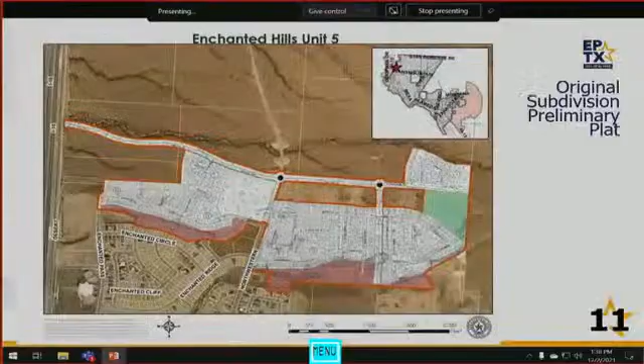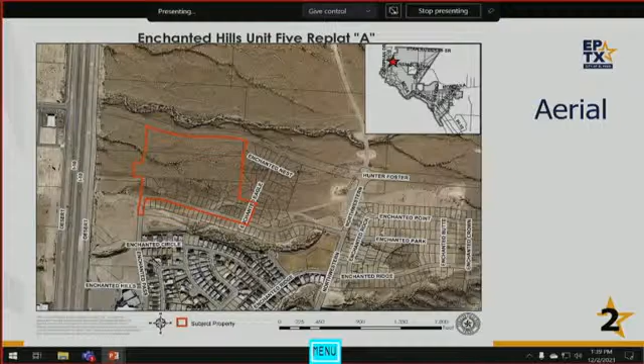We'll get back to the beginning of the presentation. So Enchanted Hills Unit 5 Replat A is item 3 on the agenda. This is a re-subdivision combination application for 32 single-family lots, one 14-acre commercial lot, and one lot for a drainage pond that is approximately .4462 acres. This lies within and is in conformance with the Enchanted Hills Land Study of 2008. As such, the proposed subdivision was granted vesting rights and is being reviewed under the former subdivision code in effect at that time. Here we have the subject property on the aerial map. You can see to the west, north, and east is vacant land, and then to the south is single-family residential subdivision development.

Here we have the subdivision plat superimposed on the aerial photo, and I will outline the changes proposed in this re-subdivision plat. They are proposing to extend Enchanted Pass Drive up to intersect with Hunter Foster Drive, the road on the north. Just to the west of that, you see in purple the new proposal for the drainage lot. The lot configurations of the lots on those 3 cul-de-sacs at the south end of this subdivision have been reconfigured slightly to accommodate the commercial lot. They changed the boundaries to square up that commercial lot to make it a little bit more usable and more rectangular.

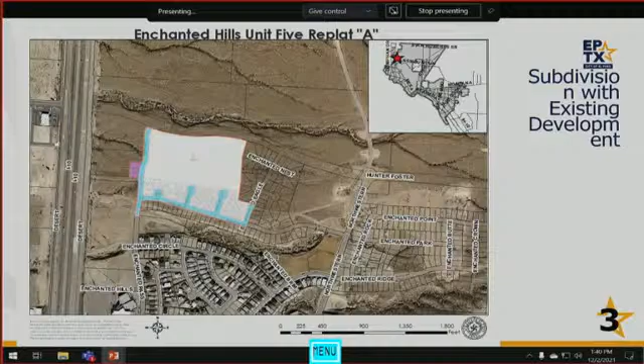Here we have the final plat. This illustrates a little more clearly those redesigned lots within the 3 cul-de-sacs to the south. We have gone through and made sure that all those redesigned lots do meet the minimum area and width requirement for the zone.

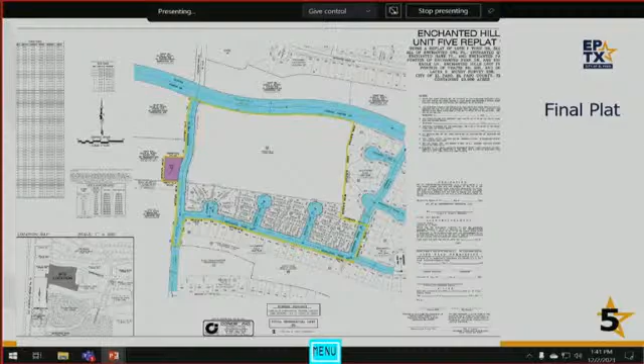This is a copy of the land study map from 2008. Kind of in that clouded area on the left side in red is roughly the area where this subdivision plat is being proposed.

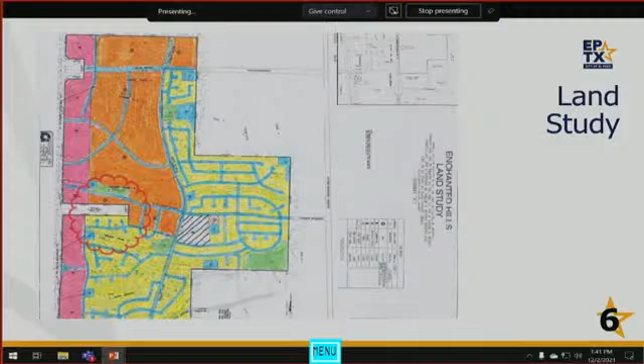We did go through and ensure that from the time of the approval of the land study, basically every 1 to 3 years there's been a new phase or a new unit of Enchanted Hills subdivisions being developed over the years, so they have thus preserved their vesting rights.

Along with this application, there are 2 modification requests. These modification requests are consistent with the same requests that were made and approved in 2019 when the Enchanted Hills Unit 5 subdivision plat was originally approved.

They are, number 1, to allow for a modified major arterial street for Hunter Foster Drive. They have a 108-foot wide right-of-way instead of 110 feet. Rather than having 15-foot parkway on either side of the road, on the north side they have a standard 10-foot parkway. On the south side is an 18-foot wide parkway with a meandering bike and hike path.

The other modification is to allow street names in excess of 13 characters for the streets that are on the list. I won't bore you by reading all those street names, but again, they are consistent with what was previously approved in 2019. But since they are proposing to extend the road to intersect with Hunter Foster, and because they are proposing the new commercial lot, these modifications do need to be reconsidered and voted upon by the Plan Commission today.

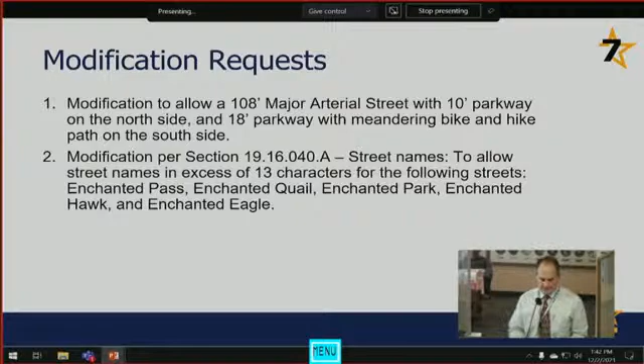Because there were modifications proposed that need to be approved, notices were mailed to property owners on November 17th. To date, we have not received any phone calls or emails either in opposition or support.

And with that, staff recommends approval of Enchanted Hills Unit 5 Replat A, with the one condition being that the double frontage lots, of which I think there are only 2 of them, be required to have landscaping on the rear in compliance with the code. And that concludes my presentation.

Thank you, Mr. Woodward. Any questions for staff?

What would be the zoning on the commercial lot? That actually, I believe, this commission heard that proposal sometime earlier this year to rezone that property to commercial. If I'm understanding correctly, I think the city council has not yet voted to finalize that rezone, so it's still pending.

Commissioner Guzman: As far as the parks, are we not showing parks in this because it's a combination of whatever has been built before? Staff: Yes, so the original Enchanted Hills Unit 5 did contain some parks, and in the overall development on previous phases and previous units, there are some parks. But since this is just kind of a corner of that original Unit 5, it doesn't show on this particular plat, but there are parks and open space and some meandering trails throughout the overall development.

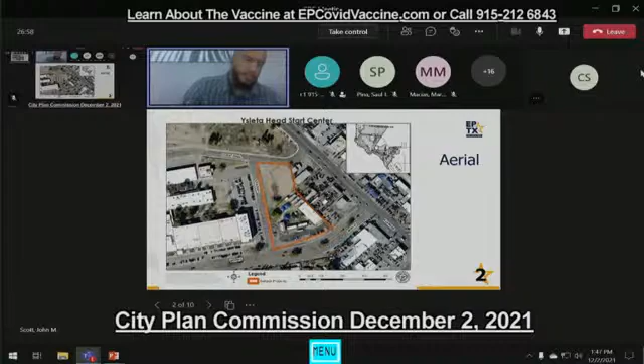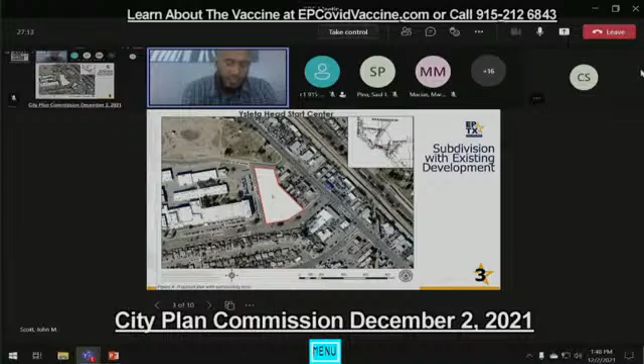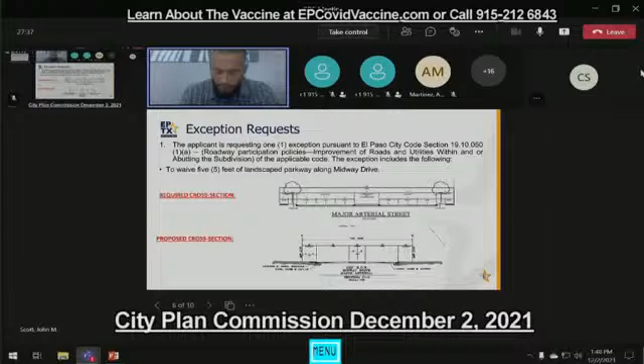The applicant's requesting one exception pursuant to El Paso City Code Section 19.10.050 A1A, roadway participation policies, and that's to waive 5 feet of landscape parkway along Midway Drive. Here we see the required cross-section and the proposed and existing cross-section.

When evaluating the exception request to waive the required improvements for Midway Drive, it does meet the criteria under 19.10.050A1A, as 50% of the lots within a quarter mile of Midway have been developed, and the existing street improvements along Midway are the same nature as the exception request presented.

There is a proposed rezoning for this parcel, proposing to rezone from RF to C1, that's been submitted. No date has been established for a CPC hearing yet.

And with that, staff recommends approval of the Isleta Head Start Center as a major combination, and approval of the exception request, subject to the following condition: that rezoning case PZRZ 2127 be approved by City Council prior to the recording of the plat. And that concludes my presentation.

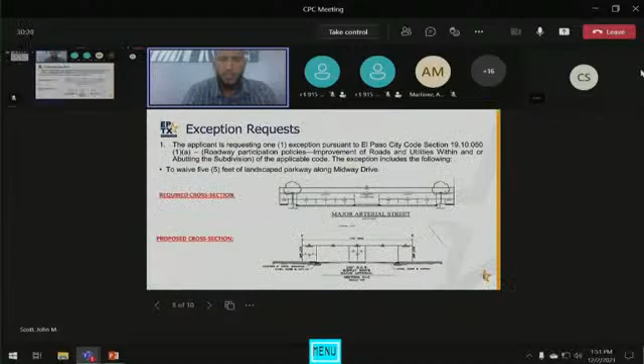And Student Place is to DSC standard on one side, and then the rest of it is commercial development. This little pocket here has a mix of standard and not standard, but it's not 50% of the quarter mile buffer, so it does meet the criteria.

So within the quarter mile buffer, you have this residential pocket down here that has set portions of the parkway that are to DSC standard and portions that are not. Within Midway, going down along the applicant's proportionate share towards Riverside High School, as you can see, it's the same sidewalk and then parkway or parking lot. Along Student Place, the applicant's proportionate share does meet the standard.

Same with along Vocational, but on the opposite side of Student Place, it does not meet the standard. Same with on the opposite side of Vocational. On Alameda, you're not meeting the standard, and then there's more commercial within the buffer. So all in all, within the quarter mile, there's not the 50% meeting it.

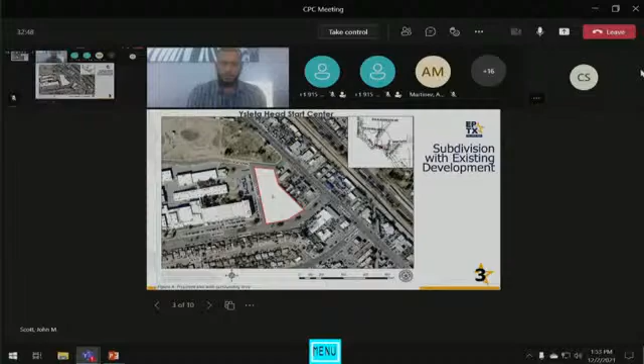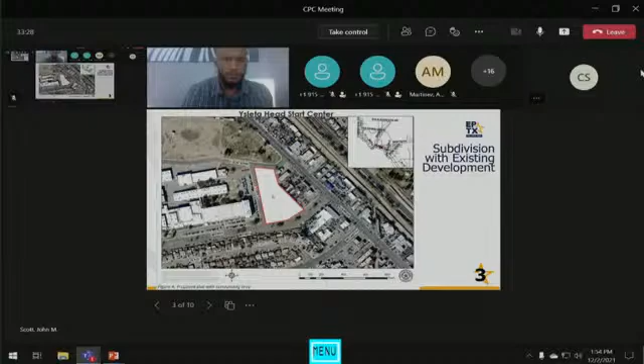I have a couple of points. I don't want to punish institutions necessarily, but when it's an institution doing a new development, I feel like we should not necessarily blindly waive modifications, especially this mixed amount. It's not clear that there's no DSC compliant cross sections in this area. So in my opinion, I don't think we should allow for the modifications, especially since there's really no one here to argue for that. That's my opinion, but I'll entertain a motion or further discussion.

To the chair real quick, if I may. Sure. Raul Garcia, Planning and Inspections. So just to provide some additional information, this is essentially a cleanup.

Obviously, the school facility has been there for years. The existing conditions have been there for years. It is unplatted, so every time they want to add a building or do some changes, we always have to go through this process. They're taking care of that today. The zoning case Mr. Scott mentioned, that's also a cleanup. It's currently split zone, RF and C commercial, so that's posing issues for them as well. They're coming in to rezone. So again, it is a cleanup, essentially the existing conditions that have been there for years.

Anything approved today would only apply to that portion fronting this property, which is just a small portion that encompasses that whole frontage applying to Riverside High School. And the parkway, so what is it now? Essentially what we have here is a wider than usual sidewalk with a missing parkway. But it is at least a 7 foot, probably a little wider, sidewalk.

Okay, I realize the nature of what I'm suggesting, that they would have to pull up the sidewalk and plant a parkway and move the sidewalk. But I did not actually realize that it's a long-standing facility, so maybe that's too far gone. So I'll retract maybe, but I'll leave my point that when an institution is doing this kind of thing, I think we can allow for less modification and a higher standard. Yes sir, that's definitely something we can note moving forward in early discussions with these types of projects, something we can take into account. Okay, yes sir, thank you.

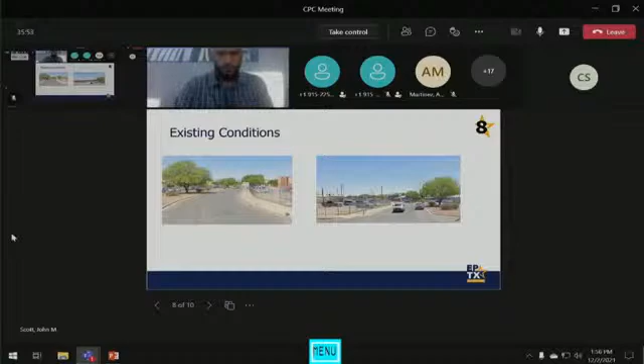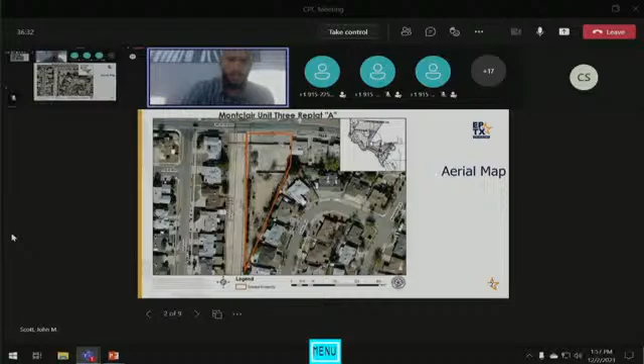Yes indeed, John Scott again, good afternoon again everyone. John Scott, Planning and Inspections. Item 5 on the agenda is Montclair Unit 3, Replat A. This is a re-subdivision combination. Here we see the development on the aerial imagery. The development is located in District 6, north of Montwood, west of McRae. Primary access to the subdivision is proposed from Montwood Drive, and the application is being reviewed under the current subdivision code.

Here we see the proposed final plat superimposed over that aerial image. The applicant is proposing to subdivide into two commercial lots, two residential lots, one being 6,300 square feet and the other one 38,062 square feet. So one residential lot into two residential lots, 6,300 square feet one lot, 38,062 square feet the other lot.

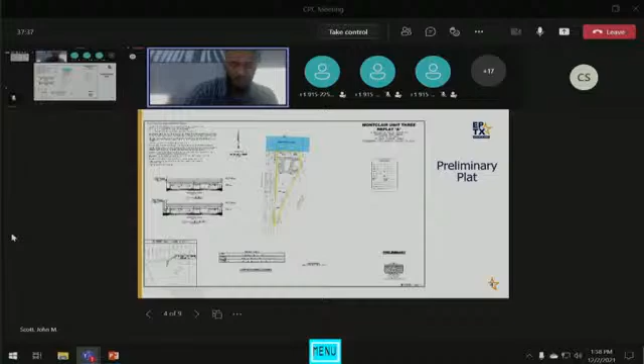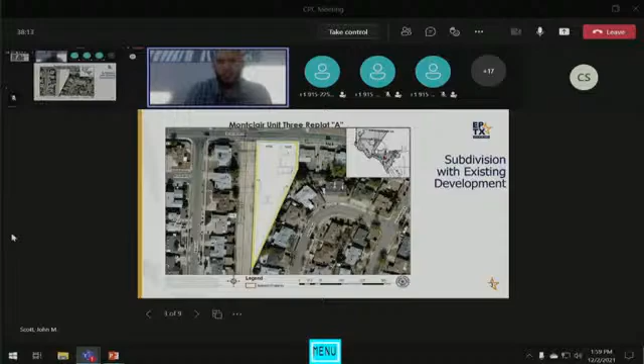Notices were mailed to property owners within 300 feet on November 17th, and the Planning Division received 2 calls of inquiry and 1 call of opposition to the request. The nature of the opposition was related to debris from potential trash behind the properties along Gerlach going into their property, and them having a concern with that potentially happening. With that, staff recommends approval of Montclair Unit 3 Replat A on a re-subdivision combination basis.

And that concludes my presentation. I'll take any questions. Thank you, Mr. Scott, any questions for staff? Sure, Kathy. So what about the opposition communication, what can be done about the debris going into the residential yard?

The situation is the same as it is right now. As it stands, it's one residential lot, so not much is changing. This is just two residential lots. They asked about fire review, and fire is recommending approval.

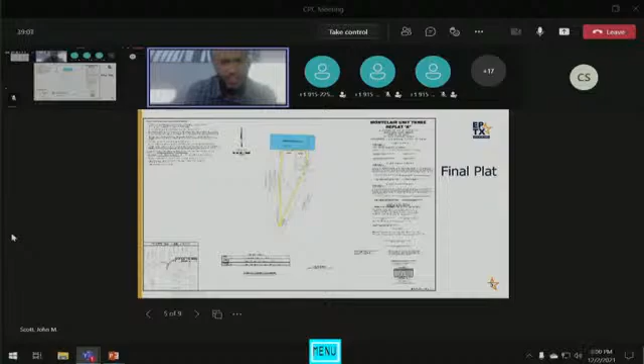It's the same situation anybody could have with a neighbor to the rear. The neighbor could have trash in the rear that another neighbor doesn't like, and it blows onto their lot. Obviously this is a bigger lot and affects a few properties to the rear, but it's just a matter to discuss with the neighbor. As far as the city, it would be bringing any of those issues up to code enforcement.

Thank you. So obviously, if there's anything illegal, they would bring it to code enforcement just as any other citizen would, I would say. It's just that that one lot seems really large, 38,000 square feet, right?

It's huge. It definitely is, but as it stands right now, it's one lot. Kevin Smith with Planning Inspections—with any undeveloped lot, often there's not eyes on the lot, so items may accumulate over time with the winds we have here in El Paso. With it potentially being developed into two residential lots, that would give an opportunity to be developed, and with proper care of the lot and eyes on it on a constant basis, that would assist.

And obviously, as Mr. Scott mentioned, if there were debris blowing over excessively, it happens from time to time, but if it's excessive, that's where our code enforcement would be notified and would investigate appropriately. Thank you. Any other questions for staff?

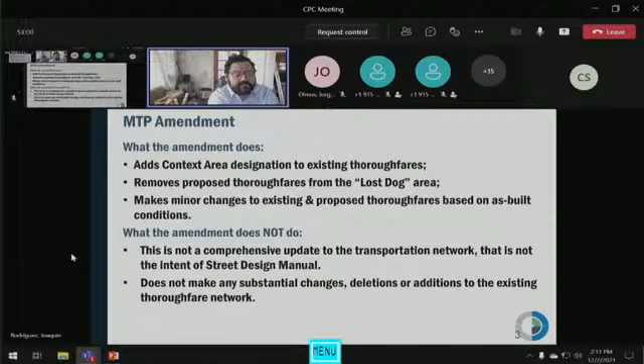This second portion here, what the amendment does not do, comes from that meeting with the executive committee of the developers focus group. This is not a comprehensive update to our transportation network. There were a lot of concerns about parts of the MTP and thoroughfares designated on the MTP not aligning with the existing transportation grid, with development plans, or with future land studies. That is not the intent of the street design manual. That's not to say it's not something the city should undertake, but that's just not the effort we're doing right now. This does not make any substantial changes, deletions, or additions to the existing thoroughfare network.

Secondly, the DSC amendment. The only amendment we're making to the existing design standards for construction is removing the street cross-section guidance from the DSC and referring designers and design professionals to the street design manual. What this amendment does not do is make changes to technical standards and specifications. This might be forthcoming as a separate effort by the Capital Improvements Department, in association with Planning and Inspections and a number of other departments, but that's not what we're looking at today.

Similarly, this does not directly address stormwater management or drainage design elements in the DSC. This may be a forthcoming effort, but that is separate from what we're looking at today.

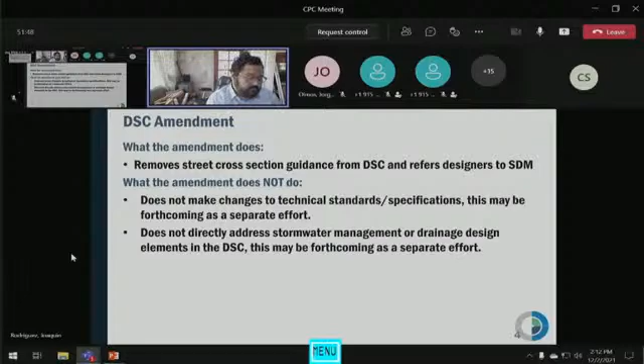These are areas where we are adopting design standards that promote things like walkability and safer street design, in an effort to create a safer transportation network in areas we would consider compact and urban. Mostly you'll see that in the urban core and other areas where people may be participating in a more vibrant streetscape than what you see in purple, which is drivable suburban.

These are the large portions of our city that have been developed in a single-family fashion for the past 40, 50 years. Those areas are going to be more vehicle-oriented by nature, and the design standards in the street design manual align with those more vehicle-oriented standards.

And then outside the city limits, you see the rural thoroughfares in pink. Those standards are really there to support lower density development typical of those areas, and additionally align more closely with the existing County of El Paso subdivision standards.

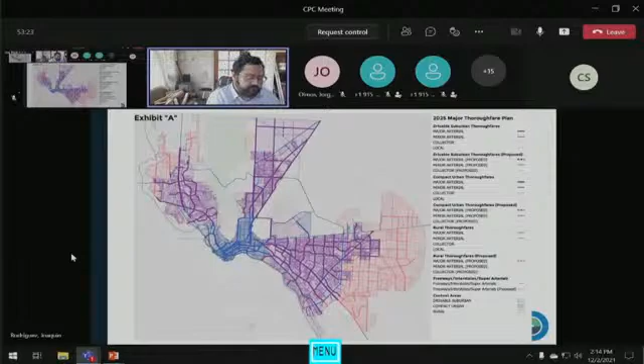Again, all of this is part of implementing Plan El Paso and the East Side Master Plan. So this ties street design standards to future land use map designations. You all are familiar with the future land use map. It recognizes that a one-size-fits-all approach is not ideal for street design, and it identifies the context of development for the next several years. This is an effort to align our street designs with the context of that future development.

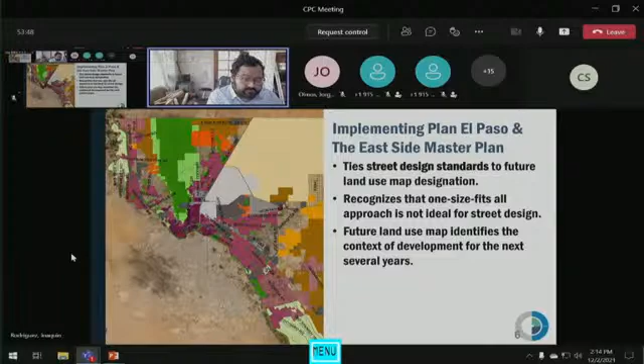A major part of it is that it consolidates elements from all these different titles, puts them into one, hopefully easy to use, more straightforward document for the development community and design professionals within the city, and with other intergovernmental agencies, so they can look to one space in our Code of Ordinances, the Street Design Manual, for all things street design related.

Again, this is a more meaningful implementation of our city's bike plan. And what ultimately will happen is the design standards for construction will be incorporated as part of the street design manual as we move forward with adoption through City Council.

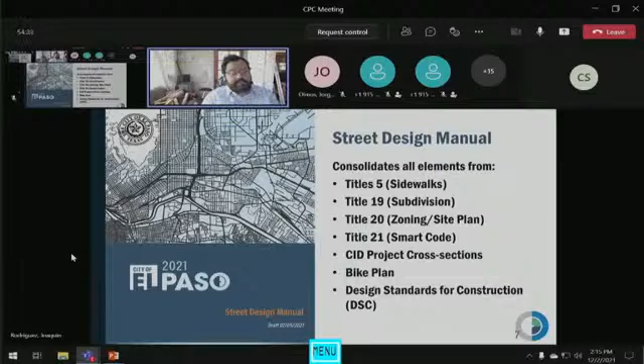We eliminate redundancies, inconsistencies, and competing priorities, implement the bike standards, and reduce the required travel width for most roadways. You'll see this in most of the design standards in the street design manual. The minimum, recommended, and required travel lane width is 10 feet where there are transit requirements, and the outside travel lane is 11 feet.

And again, it provides some administrative flexibility for existing conditions, hopefully minimizing the need for the development community, individual developers, and property owners to constantly be requesting exceptions and waivers to standards.

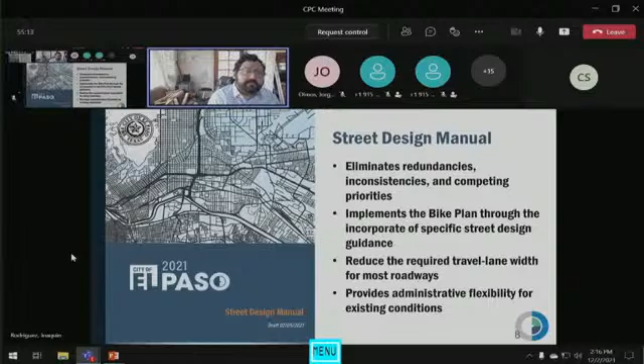Then going to Chapter 6.1, this would set your number of neighborhood access points and connectivity. Again, the existing standards for connectivity aren't being changed from what's in Title 19, so you'll see that same connectivity index requirement. Then we apply the Thoroughfare standards, which are in Chapter 4.

This is sort of the cross-section step. Then, if needed, we can look at exceptions or modifications—that's all laid out in Chapter 5. Again, the City Plan Commission will retain the same authority and purview over exceptions and modifications that it currently has, using the same criteria. And then finally, looking at construction design details in the DSC in terms of the more technical standards of roadway design.

So that's the process as it applies to private development. For public processes, it's a little bit more involved. I won't go through this in detail with you all, but it is clearly laid out in the street design manual.

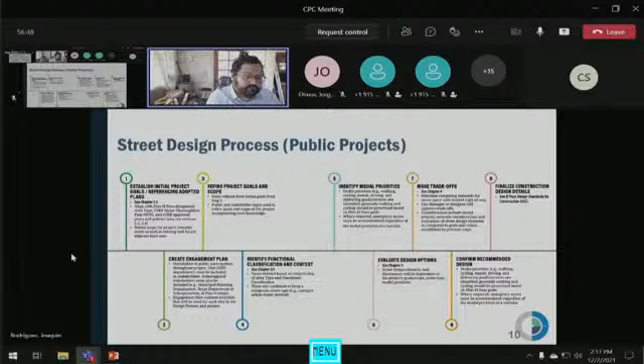Again, going back to the MTP, the old MTP only looks at collectors, minor arterials, and major arterials, and those are the functional classifications that align with the requirements of our Metropolitan Planning Organization, the MPO, and align with the federal classification system. So those aren't changing. That remains consistent so we can stay consistent with all of our region's long-range documents and with federal requirements.

The only addition is that the new MTP recognizes context in addition to function. As I mentioned earlier, those three context areas are rural, drivable suburban, and compact urban.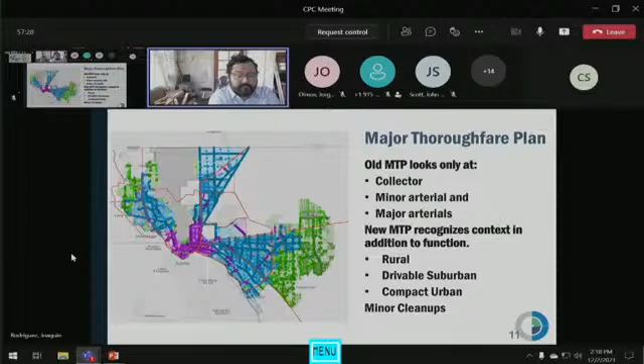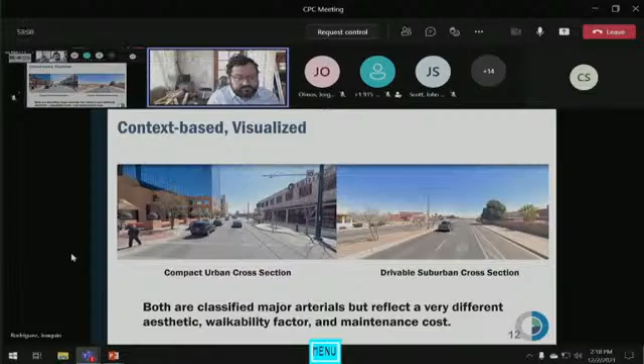This is a visualization you all have seen before. Both of these roads are classified as major arterials, but when you look at them in context, they're very different roadways—in terms of walkability, maintenance, surrounding land use, very different roadways. So the street design manual applies a different set of standards to these roadways, whereas the old design standards for construction would set out the same cross-section for both, since they're both major arterials.

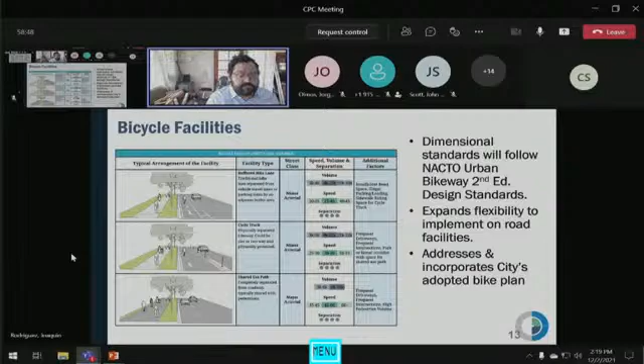In terms of bicycle facilities, this is a very general overview, but in essence, the standards being adopted with the street design manual that's in your backup, Chapter 4.7, are essentially the NACTO urban bikeway design standards that are now going to be formally adopted. So where the current code essentially requires a 10-foot hike and bike as one of the only bicycle facilities available, this expands that to off-road facilities, on-road facilities, dedicated bicycle facilities, cycle tracks, shared use paths. This aligns with the city's adopted bike plan, which has always specified that variety of facilities, but has never been implemented into our subdivision ordinance or our design standards.

In terms of lighting design, there are some changes to the lighting design process, but ultimately there are context-sensitive requirements in the IES lighting handbook. Ultimately, the minimum requirements for new developments that might affect new subdivisions have not changed substantially.

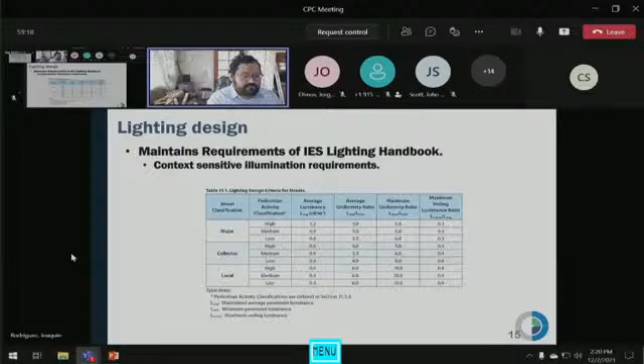So our next step, the documents are still available for public comment. We did receive a few comments after that executive committee meeting. One of them is something we will address. A few of the other comments weren't really pertinent to this street design manual effort, but were definitely pertinent to the major thoroughfare plan in general.

I definitely agree with some of the comments that it's probably time for an update of our major thoroughfare plan. But I want to be clear that this amendment to the major thoroughfare plan is not that update. That would be a separate process requiring a lot of public input and outreach. It's definitely something we can start to have conversations about internally, and something that even the City Plan Commission, with your recommendation on the street design manual, can forward comments about to City Council—potentially looking at an MTP update or a comprehensive plan update or something of that nature.

So again, if there are any comments from you all, I know we shared the links with you back in September. I don't think I received any comments that came through. If there are any comments you have today, we're happy to implement those before going to City Council with your recommendation. Our goal is to put this before City Council for action by early next year. That concludes my presentation, and I'm happy to answer any questions.

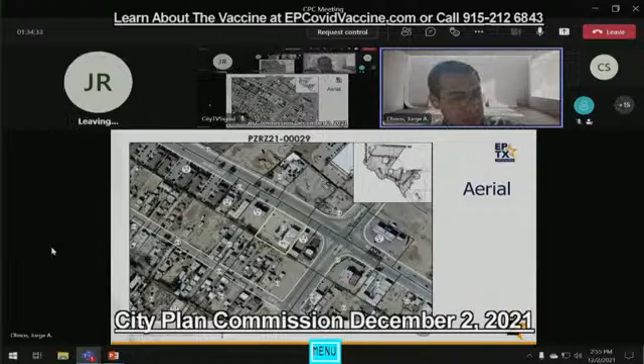This slide shows the future land use map. The subject property is located within the G7 industrial and/or rail yard future land use designation, and the proposed zoning of C4 commercial is consistent with the policies of Plan El Paso.

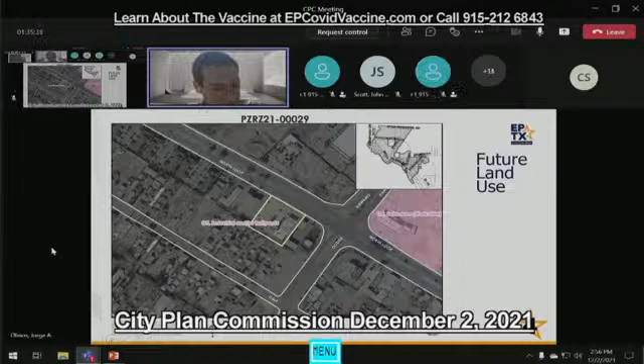This slide shows the conceptual site plan submitted with the rezoning application. The conceptual site plan shows one proposed structure with an area of 12,000 square feet. There is currently an existing 7,308 square foot building on the subject property that will be demolished. In addition, all other dimensional standards are being met. Primary access to the development is from North Loop Drive.

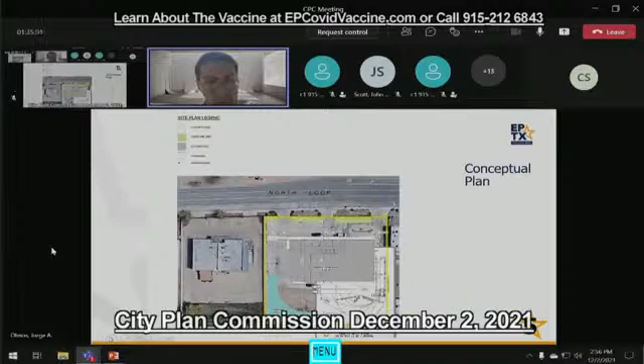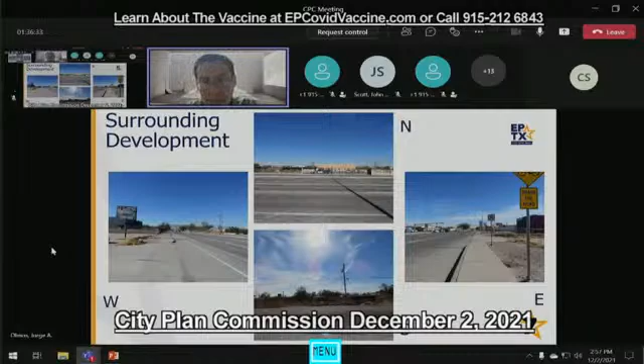Public notice for the rezoning was mailed on November 17th, 2021 to property owners within 300 feet. As of December 2nd, 2021, the Planning Division has received 3 emails and 1 phone call in opposition to the request, and 1 email in inquiry, as well as a petition with 25 signatures in opposition to the request. The petition was received just prior to the CPC meeting.

Staff recommends approval with conditions of the rezoning request, as the proposed development meets the intent of the G7 industrial and/or rail yard future land use designation of Plan El Paso, the City of El Paso's comprehensive plan. The conditions are as follows: a 10-foot landscape buffer with high-profile native or naturalized trees, at least 2-inch caliber and 10 feet in height, shall be placed at 25 feet on center along the property lines adjacent to residential zone districts or uses. The landscape buffer shall be irrigated and maintained by the property owner at all times and shall be installed prior to the issuance of any certificates of occupancy.

The second condition is that the following uses shall be prohibited: automotive repair garages, automobile or truck part sales, automobile, light and heavy trucks, buses, motorcycles, and boat sales, storage, rental, or services, motor carrier terminals, and manufacturing uses. Third, a detailed site development plan shall be provided and approved in accordance with the city code prior to the issuance of any building permits or certificates of occupancy. This concludes my presentation.

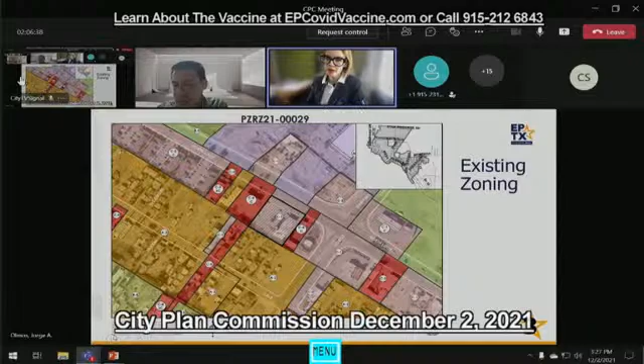Let me see. George, okay, yeah, I was going to ask Mr. Olmos - can you comment? But all properties within 300 feet, the property owners would have been notified as part of this proposal. And I guarantee for the record, notices are sent to the owner of record for each of the properties within 300 feet. It is possible that if the owner is off-site at that particular location, it would have been sent not directly to the physical location.

Right, so the owner might not have let any of the residents or the staff know. It's a possibility, right? So, okay.

Well, if there's no other comments or questions, I'll entertain a motion. I would like to move to deny rezoning to C4. I second that. All those in favor? Aye, aye, aye. Motion passes unanimously.

Thank you. And I am sincere - I will pay your parking tickets. Seriously, please let me know.

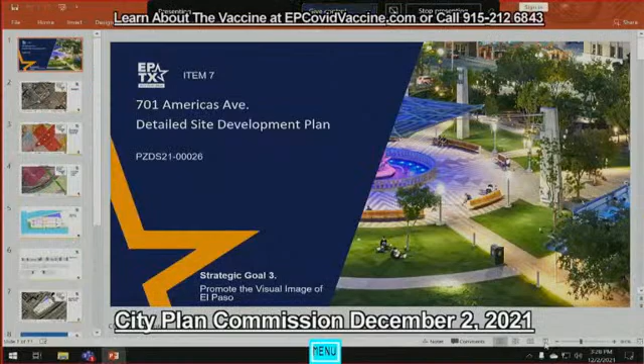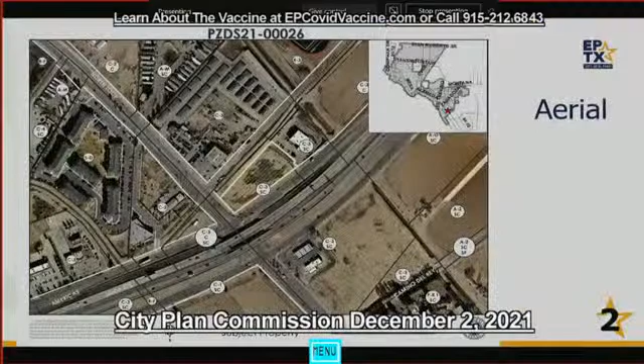Okay, thank you. Good afternoon, Chair and members of the Commission. Luis Zamora with Planning and Inspections. Item 7 on the agenda is a detailed site development plan for a proposed shopping center on 2 properties at 701 Americas Avenue. The properties are located at the northwest corner of North Loop Drive and Americas Avenue within District 6.

These 2 properties are zoned C3, commercial with a special contract. Ordinance number 6567, dated May 1st, 1979, rezoned the property from C1 commercial to its current zoning district, which is C3, and imposed conditions via a special contract. Condition 1 requires a detailed site development plan be approved by the City Plan Commission prior to any development. Additionally, conditions 2 and 3 were imposed, but we are not considering those as they're not applicable to the subject properties.

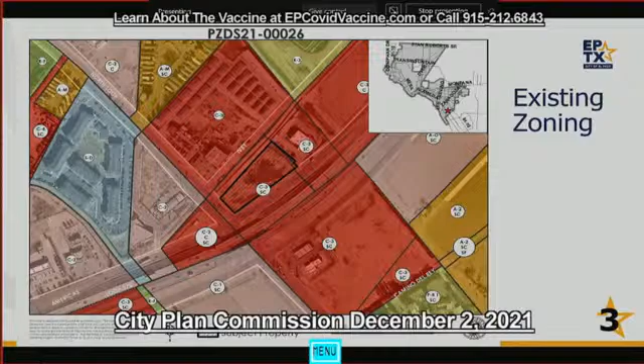Here we have the future land use designation, which is G4 Suburban. The proposed shopping center is in character with its land use designation.

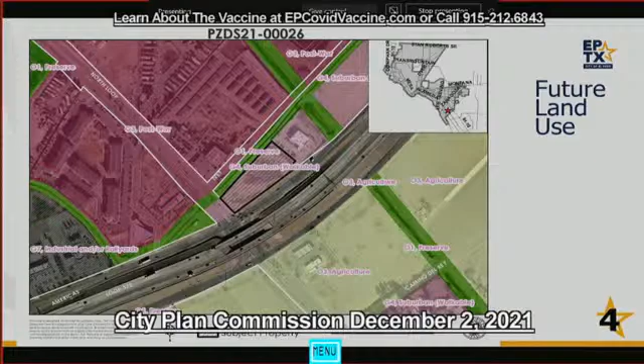The applicant proposes to develop a shopping center on both properties. The site plan shows 1 building with a total area of 21,000 square feet and a maximum height of 25 feet. The proposed development will span across the properties. The required side yard setback for both properties is 0, which allows such development in such configuration. There is also a possibility of the property owner combining those properties into one.

A minimum of 76 vehicular parking spaces and 3 bicycle spaces are required, with the proposed project providing 83 vehicular parking spaces consisting of 80 regular parking spaces and 3 accessible parking spaces, as well as 3 bicycle spaces within both properties to serve the proposed use.

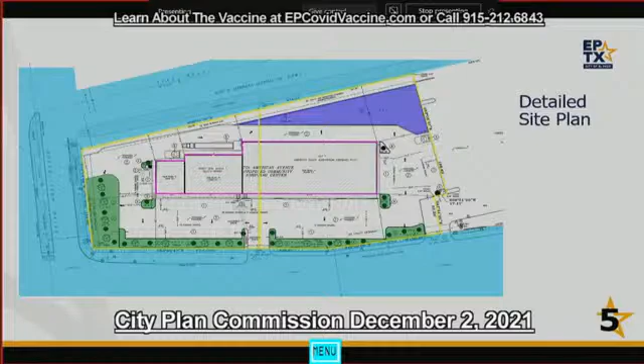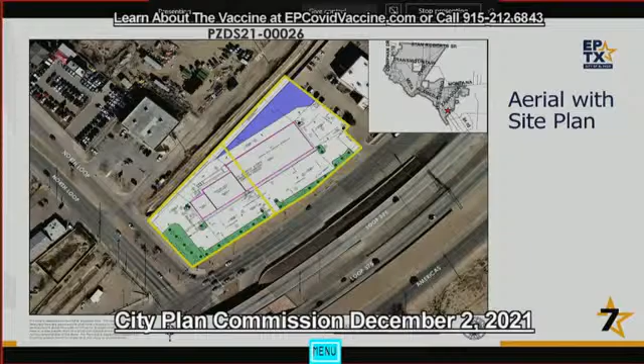Property to the southwest across North Loop Drive consists of a used auto dealership, zone C3, with conditions of special contract, and properties to the southeast across Americas Avenue, Loop 375, consist of a convenience store with a gas station and undeveloped land, zone C3, with a special contract.

So with all this, the staff recommends approval of the request, as the proposed development of a shopping center is consistent with surrounding commercial uses and meets the requirements of El Paso City Code Section 20.04.150 Detailed Site Development Plan. Furthermore, the development is in character with the G4 Suburban Future Land Use Designation of Plan El Paso. And this concludes my presentation.

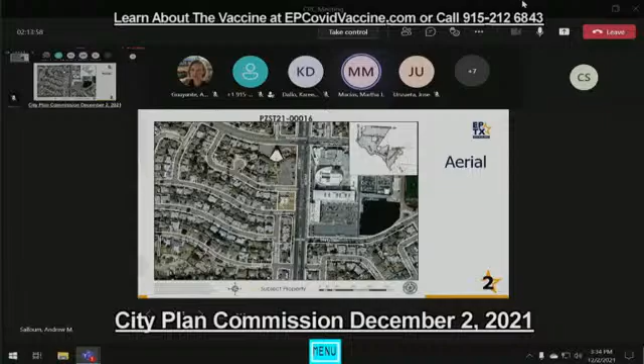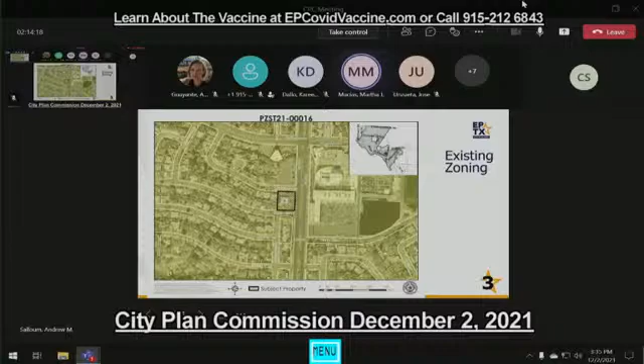It is currently zoned R3 residential and is currently used as a fire station. The applicant is requesting a special permit to allow for governmental use of building in an R3 residential zone district in accordance with the El Paso City Code, section 20.04.320, special permit. The detailed site development plan does show a new 1,768 square foot addition to the existing 4,650 square foot fire station.

The proposed development does comply with all density and dimensional standards. The development does require 13 vehicular parking spaces along with 3 bicycle spaces which will be provided on the subject property. The development also complies with Title 18.46 of the Landscape Ordinance. Access to the subject property is provided from McRae Boulevard, Daugherty Drive, and Stonehaven Drive.

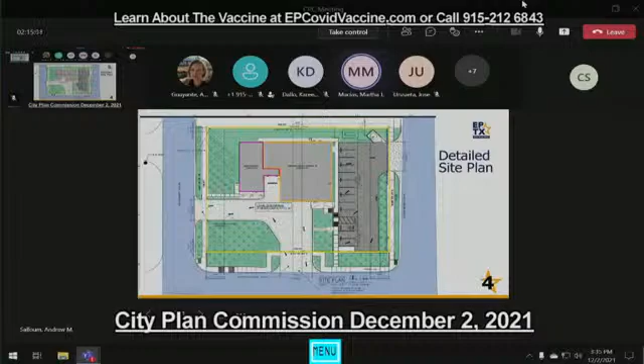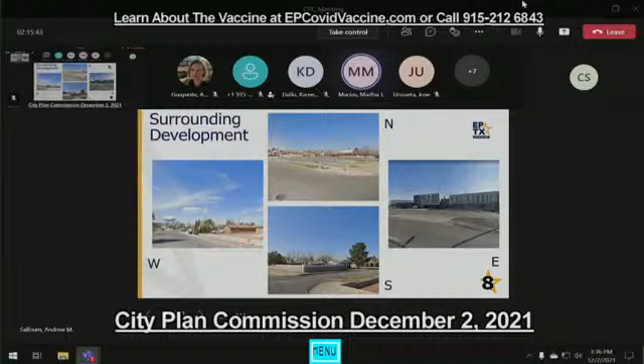Planning Division did not receive any communication in support or opposition of the request. Planning Division also did not receive any adverse comments from any of the reviewing departments. Staff does recommend approval of the special permit for governmental use building in an R3 residential zone district with the condition that the utility easement that runs through the existing fire station building shall be vacated prior to the issuance of certificate of occupancy. The proposal does meet the requirements of section 20.04.320 special permit and also 20.04.150, the detailed site development plan. Recommendation is also based on the consistency of the request with Plan El Paso, the city's adopted comprehensive plan. And that concludes my presentation.